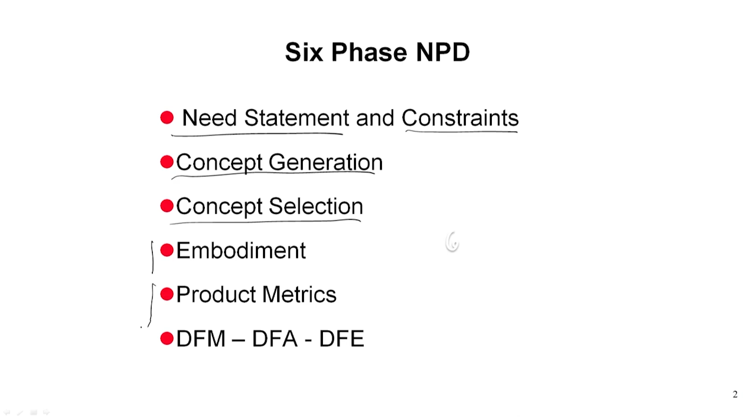After the concepts are generated, you have to select the concepts, and naturally we try to select the concepts which have some uniqueness in them. Later on in this course, we will look into embodiment, some product metrics, and certain techniques called design for manufacturing, design for assembly, and design from the failure point of view, failure proof, etc. So let us look into concept selection and what will be bothering us there.

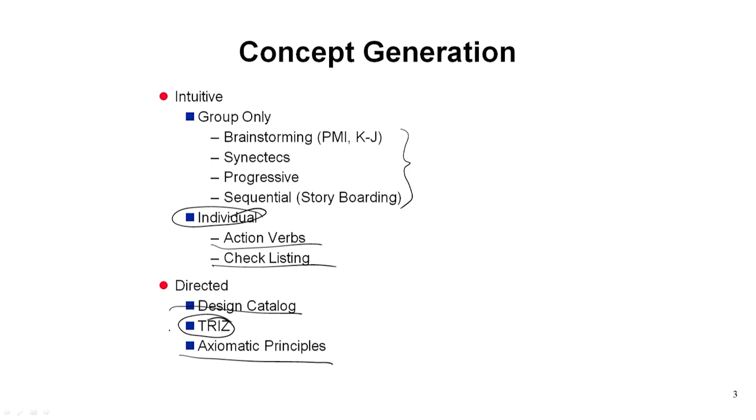One important thing in the concept generation part I told you is how you are generating the concept, whether as an individual, using action verbs, checklisting, etc. In a group, people use techniques called brainstorming, synectics, progressive or sequential storyboarding, etc. But we have done it in a more directed way. One of them I talked about is the axiomatic principle. Design catalog is important when some products are already available, and the next one I am going to discuss, which you can utilize both for concept generation and concept selection, is the theory of inventive problem solving. So let us look into it.

In the language of Altshuller: no contradiction, no problem. This means the basic tenet of TRIZ is that it is defined by contradictions. Any new design must have some contradictions in it. These contradictions will initially be physical contradictions, and our challenge will be to translate all physical contradictions into technical contradictions. What is a technical contradiction? In the language of engineering, it is called a trade-off, like the desired state can't be reached because something else in the system prevents it.

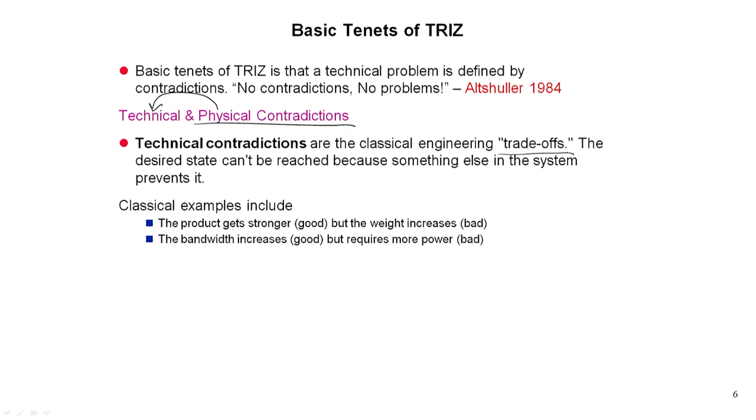For example, a product gets stronger, but the weight increases. The bandwidth of a system increases, but it requires more power. These are in terms of technical specifications. So these are technical contradictions. Well, technical contradictions, you can also think of further examples.

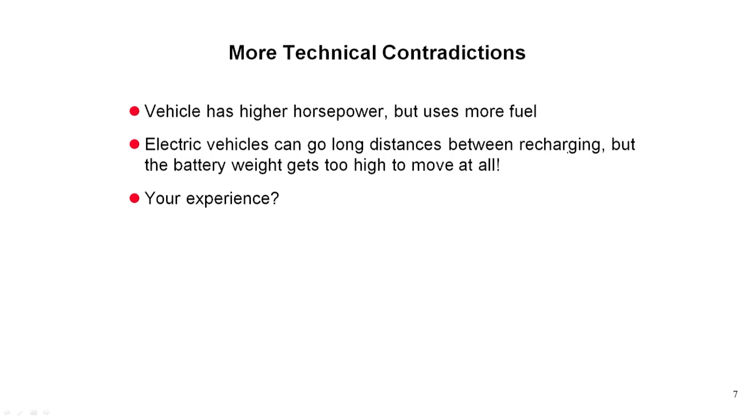For example, a vehicle has higher horsepower, but uses more fuel - a contradiction. Electric vehicles need to go long distances between recharging, but then the battery weight gets too high - a contradiction. And there are many others from your experience, as I will be talking about, please start to think of it. Now, suppose you do not go into technical contradictions, at least you will be able to identify the physical contradictions: situations where the objective has contradictory, opposite requirements.

I will give you a very simple example. When pouring hot filling into chocolate candy shells, the filling should be hot to pour fast, but it should be cold to prevent melting of the chocolate. So that is a very important contradiction in a hot chocolate fudge.

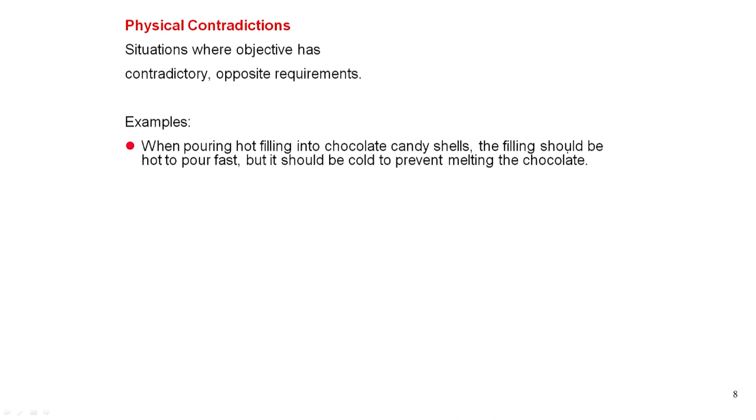It has to be done in such a way that the fudge is edible. It should not become a simple mesh of things, or it should not become too cold.

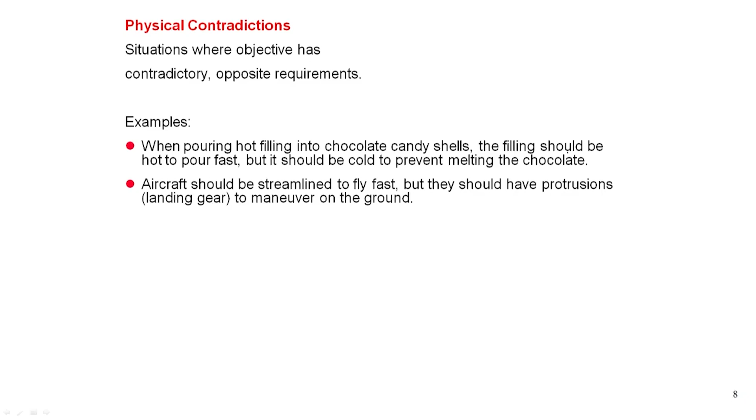I will give you another one: the aircraft should be streamlined so that it can fly very fast, but they should have some protrusions like landing gear and also the wing changes, so that you can maneuver, you can slow down the speed also on the ground. Aircraft should fly fast to go to the destination, but should fly slowly for minimum change in velocity on landing.

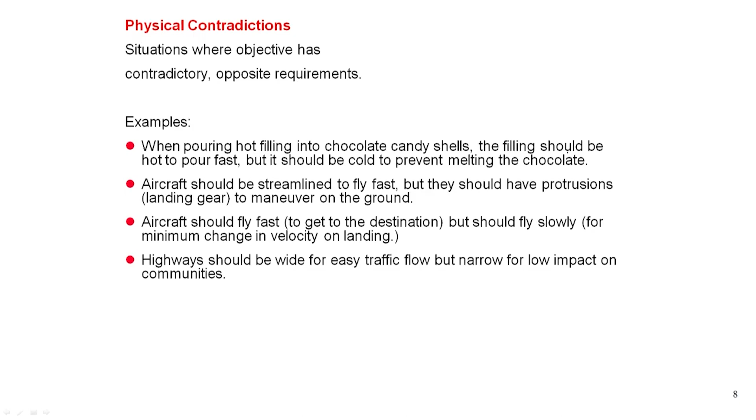Same thing is true when we design a highway. Highways should be wide for easy traffic flow, but if it is too wide, people go with a very high velocity, and if there is a collision, they die. So, it should be narrow for low impact on communities. So, you have to solve the contradiction.

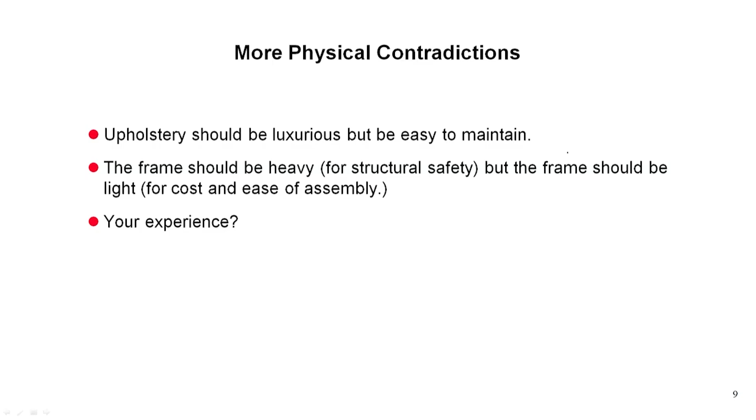There are many examples of physical contradiction, like upholstery should be luxurious, but it should then be easy to maintain. A frame should be heavy for structural safety, like my frame of the specs. From the point of view of holding these lenses, it has to be heavy enough so that it can hold them. It should not get bent or deformed, but it should also be light, and it will also reduce the cost, and ease of assembly will be there.

So, like that you will see thousands of physical contradictions each and every day, and your job will be to transform all these physical contradictions to technical contradictions. Then only we will be able to use the prism of TRIZ, and TRIZ in Russian is Teoriya Resheniya Izobretatelskikh Zadach, quite a tongue twister. That is why I said you keep TRIZ in mind, theory of inventive problem solving.

Now, there are 39 almost standard features for any technical contradiction to arise. These standard features you have to keep in your mind. First feature is the weight of an object that can move or is moving. Think of a car, weight of the car, a car can move. So, weight of that dynamic system is one technical specification. You can have another system in which the thing cannot move, like let us say this pen or this mouse. So, weight of an object that is still or cannot move.

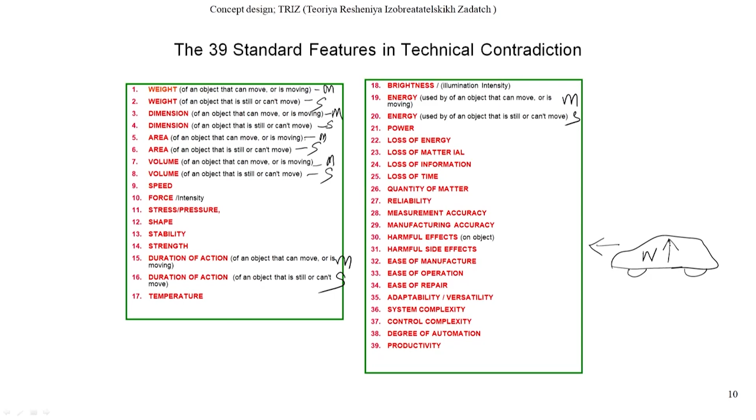For example, I will just tell you one example. Let us say I am thinking of a car. Okay. So, the car has some weight. So, you think of the car. Now, the weight of the car is one feature that let us say you want to improve. So, whatever I want to improve, I give an arrow that I am trying to improve it. So, improving the weight means I am trying to make it lightweight, with which I can have a contradiction.

Well, if I make the car lighter and lighter, I know that there will be a challenge in manufacturing, because there can be buckling of the sheets. So, the ease of manufacture is going to have a contradiction. If you have a very thin sheet, you won't be able to manufacture the car so easily. You have to think of different techniques, and if you want to take care of that, the cost will increase. So, this is just one example where number 1 and number 32 are in contradiction. That is a technical contradiction.

Like that, you think of any such technical contradictions, that is the first important thing. Start to think from now itself for any product design you have in mind. If it is intelligent, that is the best, and then what are the contradictions that will come.

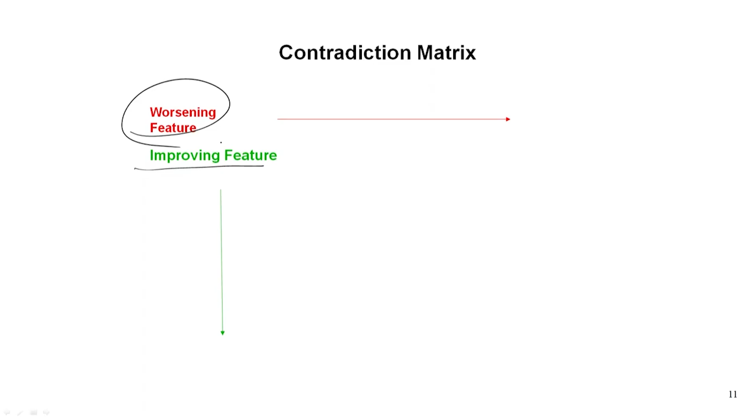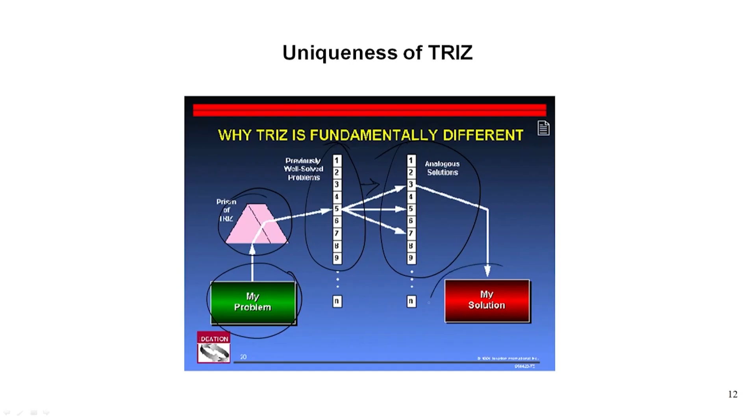Invariably, you will come with some features which are improving and some features which are going to have worsening features in it. Now, what we do in TRIZ typically is that I define my problem in terms of such contradictions, and TRIZ has already found out what are the known solutions to solve this puzzle. And then once you get the hints from TRIZ, you would be able to create your analogous solution, and that will give you your solution. So, this mapping is something that you can do through TRIZ.

So, the first important point is identify your problem, okay? And then operating environment. Let us say storing a beverage can, an engineered system to contain the beverage, is your challenge. Operating environment is that cans are stacked for storage purposes, so it has to have a particular type of shape. Resources include weight of filled cans, internal pressure of can, rigidity of can construction. Primary useful function is to contain the beverage. Harmful effects include cost of materials and producing can and waste of storage space.

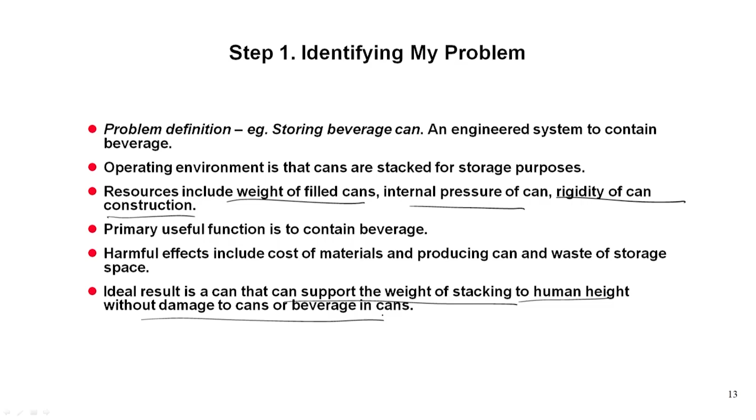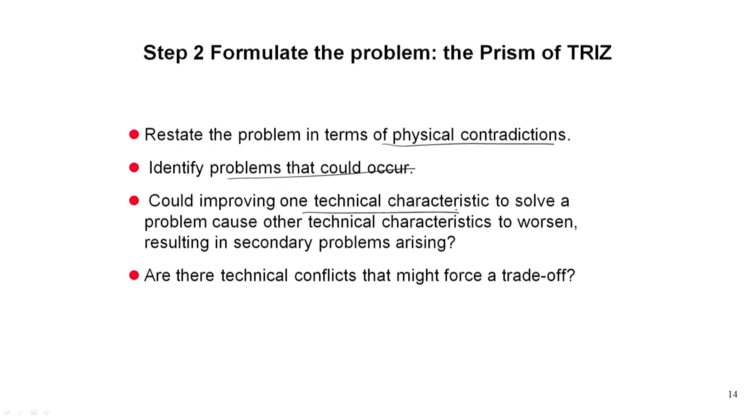An ideal result is a can that can support the weight of stacking to human height without damage of the cans or beverage in cans. That is typically the driving factor of, let us say, the Coca-Cola cans. Formulate the problem now in terms of the prism of TRIZ, that is, restate the problem in terms of first physical contradiction, identify the problems that could occur, and then map it in terms of technical contradictions, technical conflicts, and then use the TRIZ matrix for the solution.

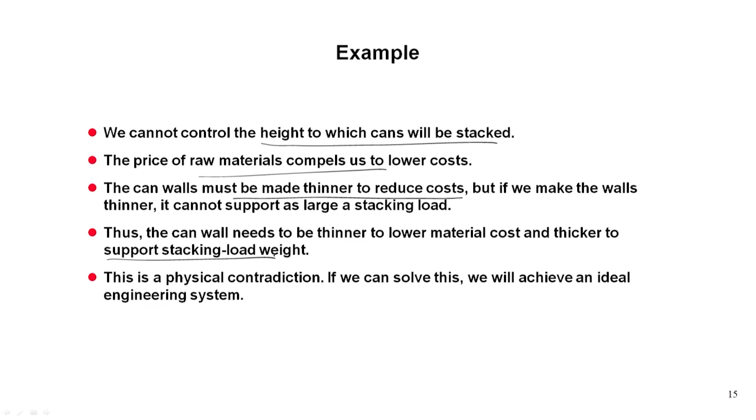There are many examples. In the can problem, we cannot control the height to which cans will be stacked, or the price of raw materials. The can walls must be made thinner to reduce cost, but if we make the walls thinner, it cannot support as large a stacking load; it is going to buckle. The can wall needs to be thinner to lower material cost and thicker to support stacking load weight, a contradiction, and then you can map it in terms of a technical contradiction.

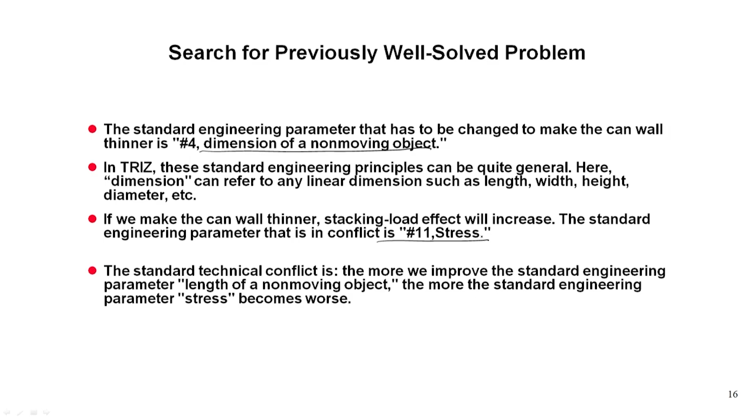Now, using, as I told you, the TRIZ matrix, which I will come to at the end, you can search for previously solved problems, like the particular principle dimension of a non-moving object versus stress, and this is a standard one. What are the principles that people have used in order to solve the problem? You have to use a contradiction matrix to do it, and the contradiction is between 4 and 11, and what you would see is that there are principles 1, 14 and 35.

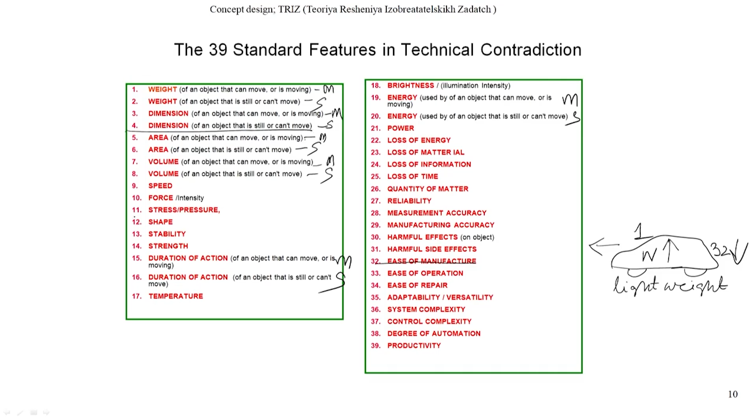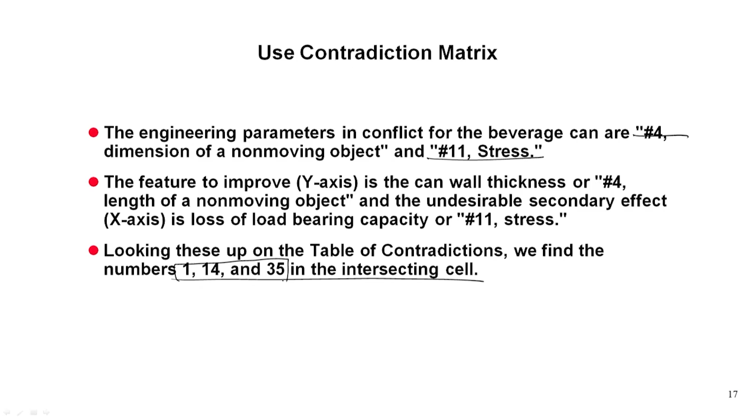Keep in mind that the contradiction is between what? Between the thickness of the system, that is technical contradiction number 4, versus 11, the stress. If you go a little bit back towards those numbers, you see it is basically dimension of a stationary object versus 11, that is the stress or pressure. That was our contradiction, and I told you that 1, 14 and 35 are the principles that people have already used to solve the problem. I am telling you beforehand, although I am going to go through the principles now.

Principle 1 is one that people have already tried for such a contradiction, that is, increase the degree of an object's segmentation. That means the wall of the can could be changed from smooth to a corrugated one. If you look at this particular water bottle, precisely that is what they have done. They have made it corrugated, so that even a thin sample can hold the weight. So, that is principle 1, increase the degree of an object's segmentation. Segmentation or modularity, we are going to see it very soon.

Principle 14 talks about the perpendicular angle at which most can lids are welded to the can, and that can be changed to a curve. We will see what it is. And principle 35 tells us to change the composition to a stronger metallic alloy or to a polymer which can sustain the load, but yet has a low density. So, 1, 14 and 35 can thus be used to solve your problem.

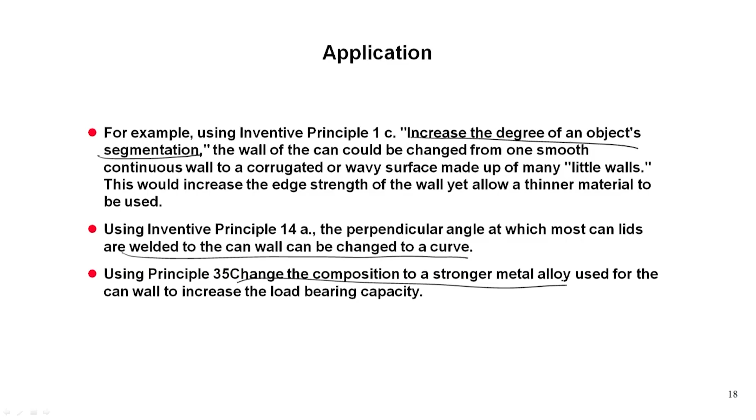Now, that means I have to know what these principles are to begin with. There are 40 such principles. So, we have 39 contradictions, and we have one extra principle. Let us look into these principles one by one. Okay. So, there are 40 principles. And I told you that for these Coke cans or for any such stacking thing, we have used segmentation, and we have used this kind of principle which was 14, right.

We have used spheroidality, curvature, increasing the curvature, and I think the property of the material is something that we have used. So, either you can use the principle here of the parametric changes or the composite materials, either of them. So, now let us look into the principles.

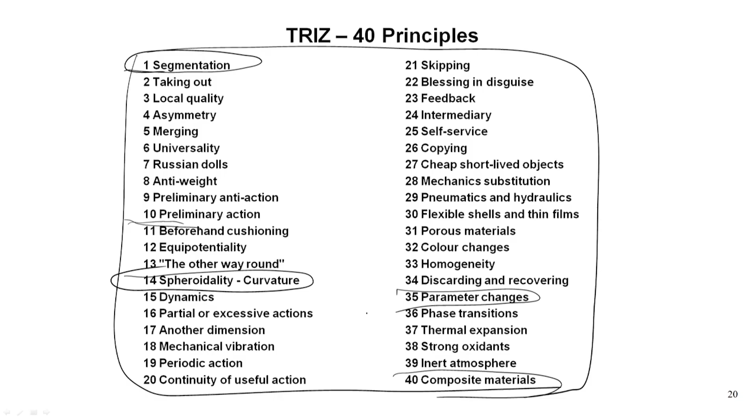Principle 1 is that of segmentation, and segmentation talks about dividing an object into independent parts. You look at a good spanner, you will see that it has been thought exactly in this way. There are many independent parts of it. The other part of segmentation is make an object easy to assemble or disassemble, so that you design it in such a way that you can very quickly open it, or very quickly join things together. And the third point is increase the degree of fragmentation or segmentation. That means, if it is already fragmented, you increase the degree.

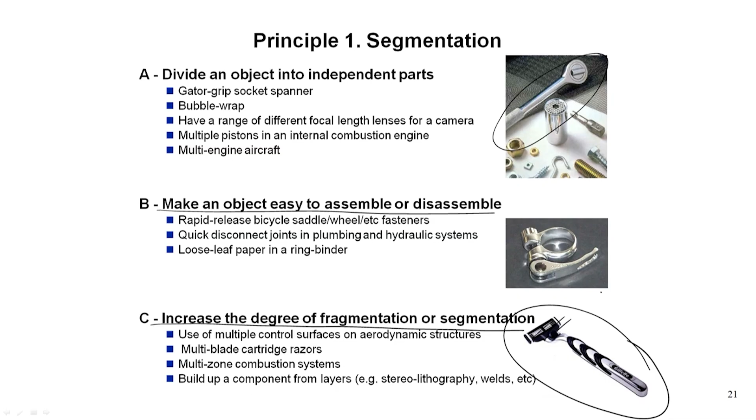You see the razor blade that we use, the standard blade versus the Gillette blade, you will see there are so many blades there. So, one after the other actually goes through the same beard to cut it. So, increase the degree of fragmentation. So, that is principle 1, the principle of segmentation or modularity.

I always say that two are the greatest beneficiaries of this. One is the computer designed by IBM. Before IBM's personal computer, there always used to be only huge supercomputers, but IBM successfully segmented the computational power into small pieces. So, the design of the personal computer is a good example of modularity.

And the second example I always give is furniture, that today we have furniture companies in which you can get your furniture in small parts which you can reassemble very quickly. So, that actually improves the business of furniture and the accessibility of the design. So, that is the significance of principle 1 of segmentation.

Principle 2 is taking out, that is, take out an interfering part or property of an object, single that out and throw away the rest of it. For example, many of us go to shopping malls, which are air conditioned, but we never hear the sound of air conditioning. Why? Because of technology similar to a split, that is, the cooling happens at one place, but the noisy compressor is kept somewhere else outside the building. So, that is the principle of taking out.

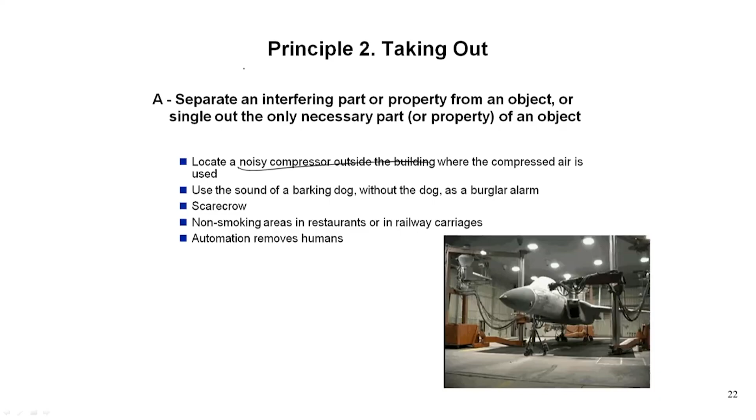Principle 3 talks about local quality. Change an object's structure from uniform to non-uniform. Always keep some local quality. For example, the very pen I am using has local qualities, because it is not entirely uniform. It has a different shape here, so that I can hold it easily. So, uniform to non-uniform.

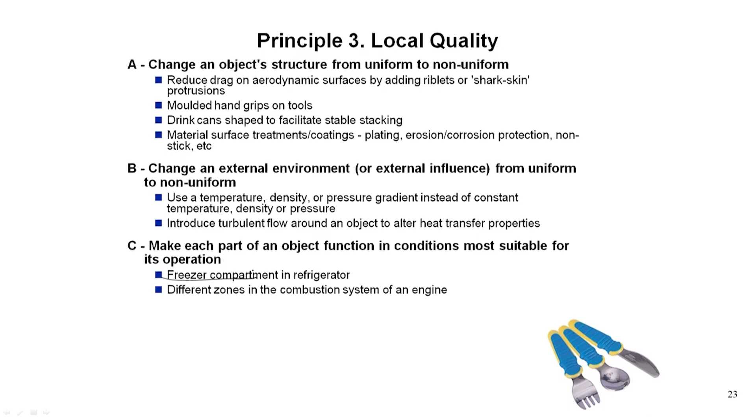Change an external environment also, if possible, from uniform to non-uniform, and make each part of an object function in conditions most suitable for its operation. For example, a refrigerator is not cold uniformly everywhere. You have a freezer compartment in the refrigerator, or different zones in the combustion system of an engine. So, these are all examples of local quality.

Principle 4 talks about asymmetry. Asymmetry is exploited on a very wide scale. For example, the greatest example is an aircraft. The aircraft wing, if you look at it, its top and bottom are of different shapes, and we call it an aerofoil shape. That actually helps to generate the lift of an aircraft. So, there we are using the principle of asymmetry.

Or change the shape of an object to suit external asymmetries, like ergonomic features we add. For example, a car steering system compensates for camber in the road. Wing design, I already told you. Turbo machinery design takes account of the boundary layer of flows. So, change the shape of an object to suit the external asymmetry.

If an object is asymmetrical, increase its degree of asymmetry, and that you can do for aircraft wings, for special connectors, for different types of scales on a ruler. You basically increase the degree of asymmetry.

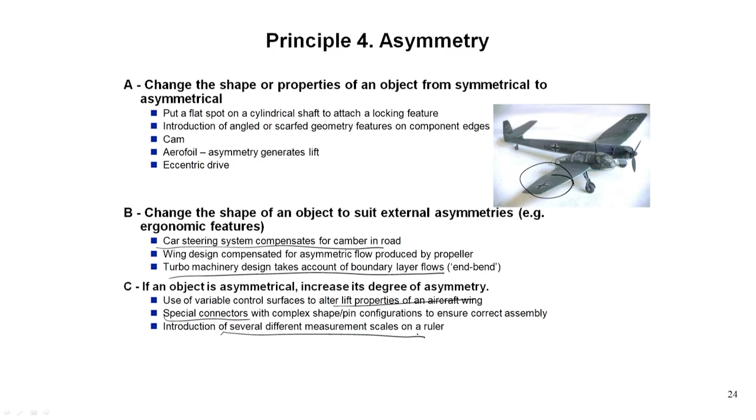Principle 5 talks about the principle of merging. Bring many features closer together, like identical or similar objects or operations in space, bring them together.

For example, multicolor ink cartridge, the same cartridge having multiple colors in it. Bifocal lens spectacles, same lens but having two different focal lengths, and double or triple glazing.

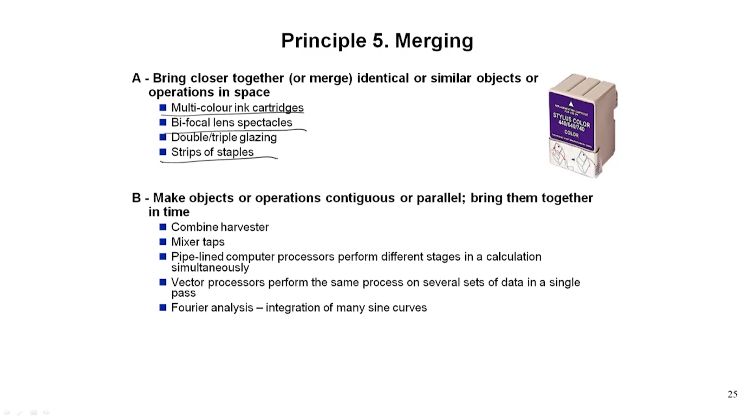Or strips of staples. Make objects or operations contiguous or parallel, bring them together in time. Combine harvesters or mixers, or pipeline a computer processing system for different stages of calculation, vector processors, Fourier analysis itself. So operations contiguous or parallel, bring them together in time, parallel processing. This is the example of principle 5, called merging.

Principle 6 talks about universality. Make a part or object perform multiple functions, eliminating the need for other parts.

For example, I have again this pen, the tip of it actually puts something here, and the bottom part of it, the end, actually has an eraser in it, which you can use to erase this whole thing. I can erase. So that means it has this property of universality in it.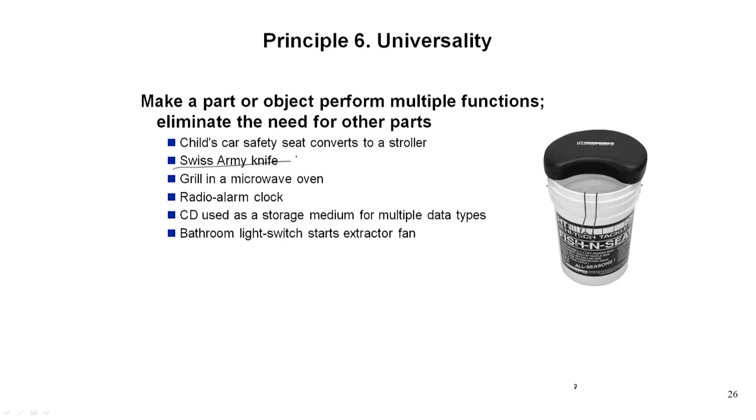Similarly, a Swiss army knife having multiple functions in one place, a grill inside a microwave, a radio alarm clock with both radio and alarm clock functions, a CD used as a storage medium, or a bathroom light switch that also starts an extractor fan. That is principle 6, called the principle of universality.

Principle 7, very important whenever you have restriction of space. It is also known as the Russian dolls principle, or nested doll. A Russian doll is basically a doll inside a doll. So place one object inside the other.

Plenty of examples in real life, including a retractable aircraft undercarriage. Place multiple objects inside others, like nested tables, telescopes, measuring cups, stacking chairs, many such examples.

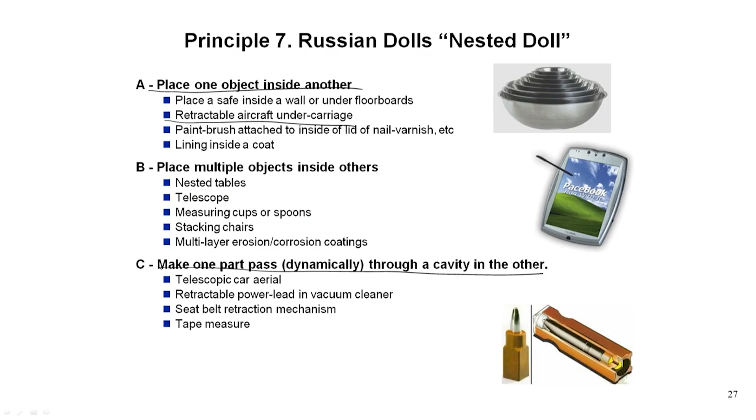Make one part, this is interesting, pass dynamically through a cavity in the other, like a telescopic car aerial. So one part goes into the other, or a retractable power lead in a vacuum cleaner, or the seat belt retraction mechanism, tape measures, where one part of the tape goes inside the other and folds. So these are all principle 7, Russian dolls.

Principle 8 talks about anti-weight. To compensate for the weight of an object, merge it with other objects that provide lift.

So a kayak with foam floats, or an aerostatic aeroplane. You are basically using a very lightweight thing, and that is what anti-weight is. You are using something which compensates.

Or, to compensate for the weight of an object, make it interact with the environment, for example aerodynamic or hydrodynamic interactions. Many different types of vortex generators, vortex shedding mechanisms, hydrofoils, aerofoils, they are all based on principle 8, either A or B, either of them.

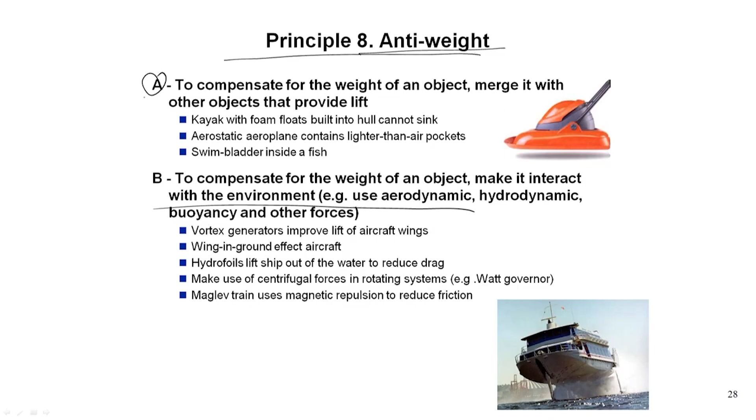Principle 9 talks about preliminary anti-action. If it will be necessary to perform an action with both harmful and useful effects, this action should be replaced with anti-action, so that the harmful effect can be controlled.

Masking objects before harmful exposure, or predicting effects of signal distortion and taking care of it beforehand, or using a buffer solution to prevent harm from extremes of pH.

Another possibility is also there, called creating beforehand stresses in an object, which is called pre-stressing, very much used in today's quickly deployable structural systems. Create beforehand stresses in an object that will oppose known undesirable working stress. This is what is called principle 9, preliminary anti-action.

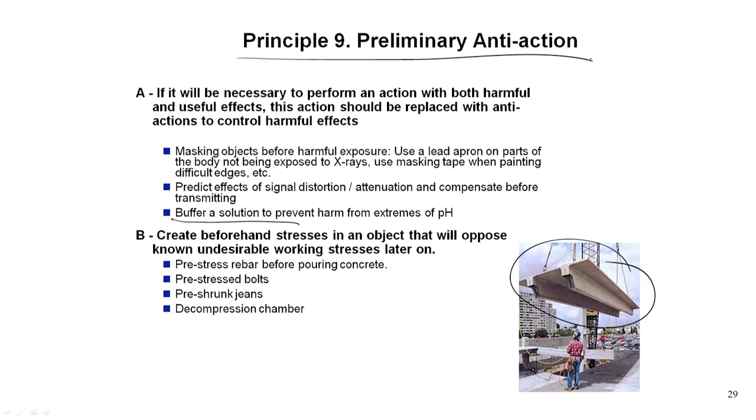I will then come to principle 10, preliminary action. This principle talks about performing some of the work beforehand, like pre-pasted wallpaper. 3M company is one of the best examples. All the sticky sheets are the best example of preliminary action.

Self-adhesive stamps. Before this, self-adhesive wasn't there for stamps, people used to do so much spitting on the stamp. Self-adhesive has taken that out. Holes cut before a sheet metal part is formed.

So you take some part of the action beforehand, or pre-arrange the object, which is also important in the context of design manufacturing systems. Pre-arrange objects such that they can come into action from the most convenient place and without losing time for their delivery.

In manufacturing, I said, production line design is very important towards that direction. There are many others, like car jacks and other manufacturing related issues, that use this preliminary action very much.

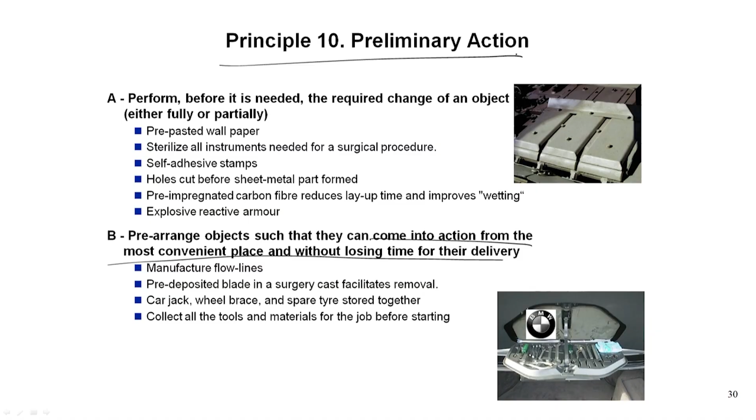So thus I have discussed 10 principles with you, and then we have to discuss about 30 more principles and then the application of it. So let us put an end to today's lecture here itself, and thank you. We will continue this in our next lecture.